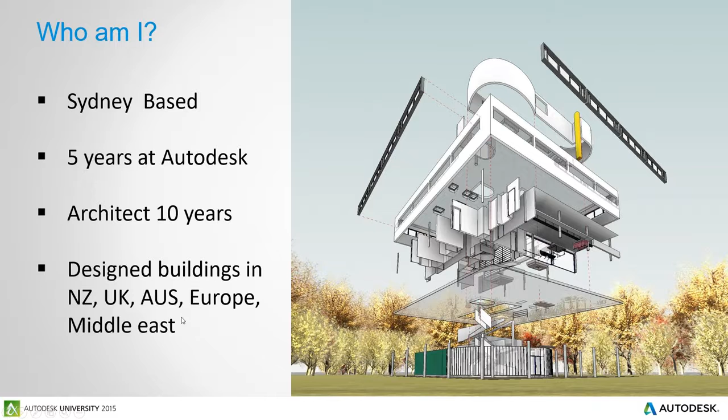So I'm based in Sydney. I've actually been at Autodesk coming up to 5 years. I was a professional architect, mainly in the UK for 10 years, and I've designed buildings in different parts of the world. Some of the firms that I've had experience at was HOK, Building Design Partnership, working in conjunction with construction-led procurement routes, so heavily working with companies like Laing O'Rourke and Balfour Beatty Construction, where it was a design build procurement.

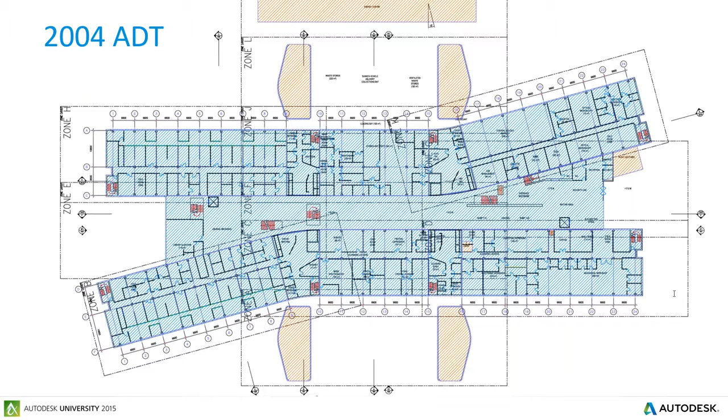The one here on the right, this one was started in AutoCAD Architecture back in the early 2000s. It was a Medical Research Council building for the University of Cambridge in the UK. What happened is when we started it, it was like this. This is ADT back in the olden days, AutoCAD Architectural Desktop, and we were working in zones, working with complex CAD systems to set up different libraries and elements and standards. By the time this project got finished and got built, the contractor ended up redoing it inside of Revit. So here's the project here, rebuilt in Revit, and this is used mainly for facilities.

So you can see here all the laboratory elements have been built into the model. This, of course, can be rendered using the Autodesk Cloud A360 rendering. And with all the details, we can also start to use some of the features in Revit, like exploded assembly drawings. So for something that needs a little more explanation, like a laboratory table, you can grab all these elements and pull them apart from the model and create these assembly visuals to better explain how those parts get assembled together on site.

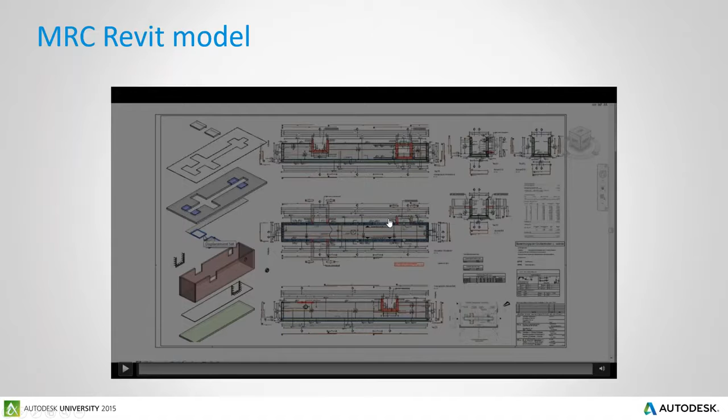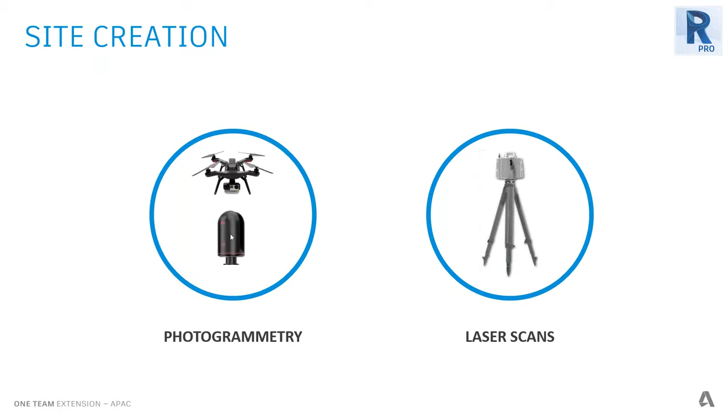On the left here, we have photogrammetry, and this is very popular for large sites where you can fly over them with drones, and you can take the photographs that you capture with the drones and stitch them into 3D models. There's also the Leica scanner here as well, which is a very simple and easy portable scanner to use, and that can also capture site information. So there's 2 ways that you can capture the information and then use it within the Recap 360 Pro application.

So as mentioned, data capture, this is the laser scans for the sourcing, or it could be photogrammetry data depending on how you capture it. What we do is we take that information and we load it into either Recap natively inside of the desktop product, or we can go to the cloud and take that photographic data and it will stitch it together. The result here is that we can optimize that data. There's also tools to clean it up and then reuse that clean, optimized data inside of your authoring tools like Revit or AutoCAD or Civil 3D.

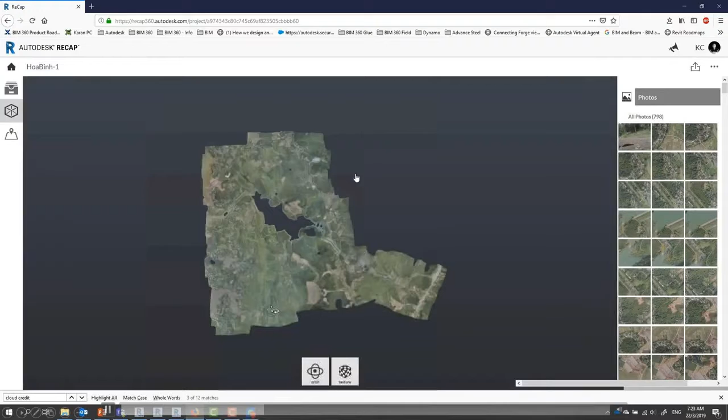So I've got a quick example of a drone photogrammetry scan of a large site that one of my colleagues did in Singapore. And this is the video. So hopefully there's not too much lag. What we do have here is the Recap 360 interface, and they've gone and captured all these photographs and they've loaded them into the file. Recap knows how to stitch the information together.

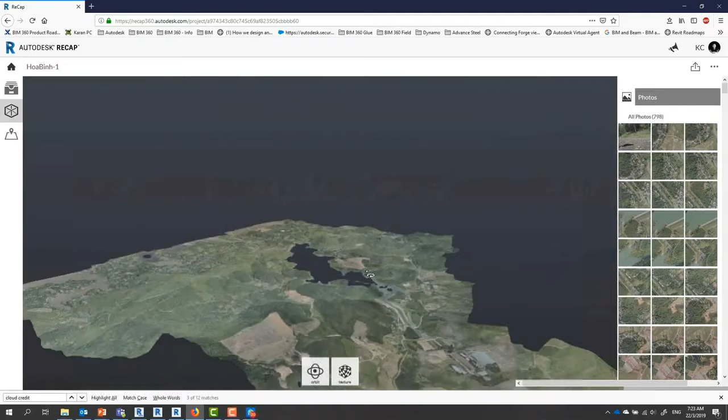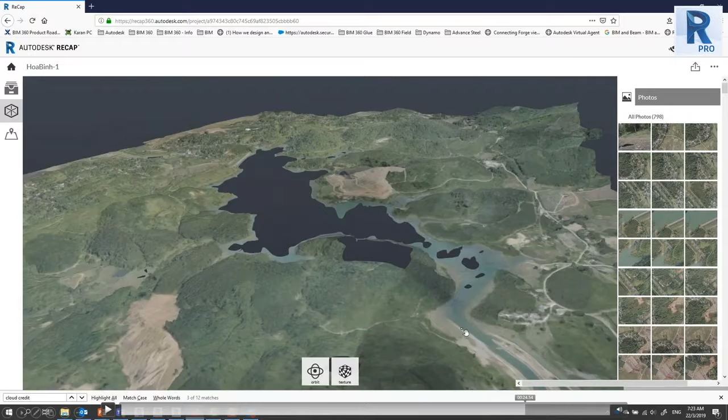Now, in certain sections, if you haven't flown over them or there's a lot of reflections, it may show certain holes. But usually if it's an overcast day and there's not too much contrast, you can get some really good topography information just by using a basic drone. So that's what it looks like inside the application. I'll just go back to the beginning here. It's just photographs. You load them into Recap 360. It stitches them together, and then you have a 3D site for you to work with. So that's more of the macro scale.

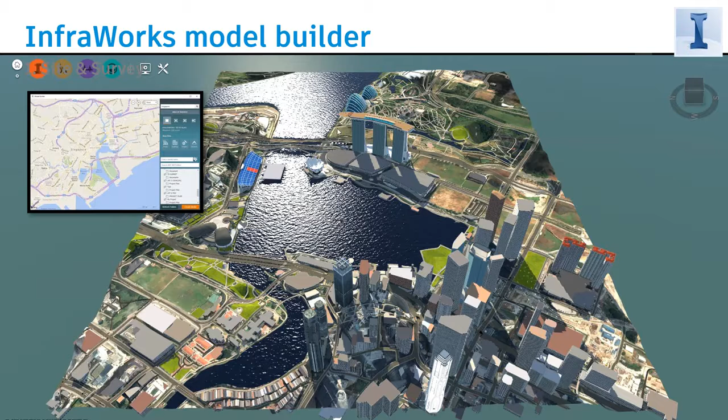So the site I have here on the screen is Singapore, and some of these buildings have been captured from the model builder. Others I just got from the SketchUp warehouse. I brought them in and positioned them on site to give us a quick fly around of what the Singaporean harbour is like here. So the video I have here is how you go and use your model builder to capture the site. So all you've got to do is choose your location in the world, and you can put in your exact street address that you want.

I'm just going to choose Singapore and navigate into the main bay here, to the main marina. And what I want to do is capture a certain area. Now, you can go right up to 200 square kilometers should you want. So you can pull down some pretty large site data here. This one I'm going to keep under a square kilometer.

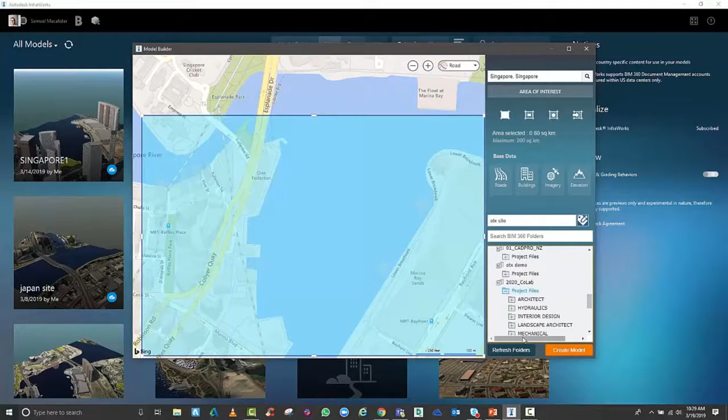What it's got here is basic topography information, and that's based on DEM data. So it's going to be within meter accuracy. You're not going to get millimeter accuracy with this. We've got the imagery coming from Bing Maps. We've got buildings that are available, and these are basic buildings, roads, and in some cases there are underground services available as well, so underground train lines.

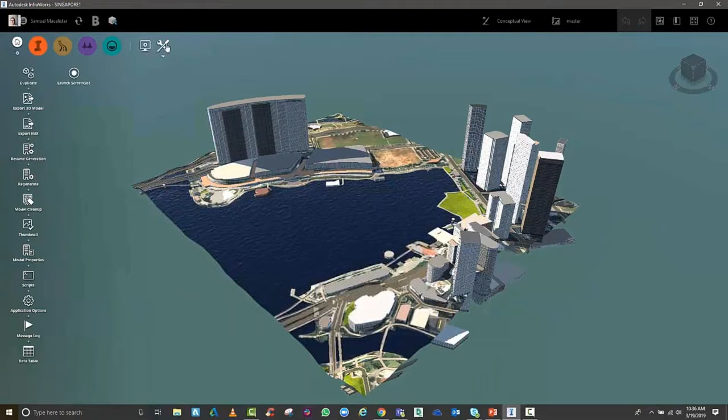So that's gone to the cloud and it's pulled down this model for us. So this is what you're going to get for free out of InfraWorks 360 if you need a site to begin with. And again, this could be for a feasibility study, just for conceptual design, you just want a basic idea. Now, let's say we want to go a little bit further with this.

Do excuse me, my fan is running a little bit hot on my computer. Hopefully that's not interfering with the audio too much.

What we can do here is we can export it out from InfraWorks as an IMX file format. Now you can do it as FBX or convert to other file formats as needed. Basically what this is going to do is allow you to bring it into our Civil 3D application for deeper development.

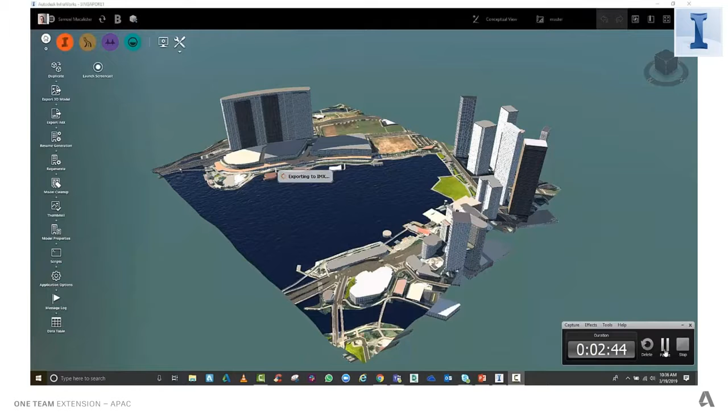So just bear with me, I'm just going to sort out my fan. I'm getting pretty close to renewing my computer. It's a special computer which can be overclocked, and sometimes when you have it turned up on turbo, it can fire up the fan when it gets a bit hot. Okay, so I apologize about any audio issues here.

So what I just did before was I pulled down that data from InfraWorks 360, great application you get in the AEC Collection. You pull the data down from the cloud, you've got a free site model. But let's say you want to take it into a vector-based application. You can bring this into Civil 3D. So what I did was I exported out from InfraWorks an IMX file, and now I've imported to Civil 3D.

And now we're starting to see something a bit more familiar in terms of some basic topographical information, some contours here. We've got the layouts of the roads, and in certain points there is some underground information here as well. So again, it's a great quick way to get some basic information to start your site master planning or urban designing, just site context for your buildings.

Now, I'm bringing this in. I'm just going to use some default coordinate systems. If you're familiar with world coordinate systems, then you can set this all up. In Australia, we use the map grid of Australia. And again, this is always changing. I do believe the one in Perth has changed just recently. So it's always good to work with a surveyor to make sure you're using the right map grid system.

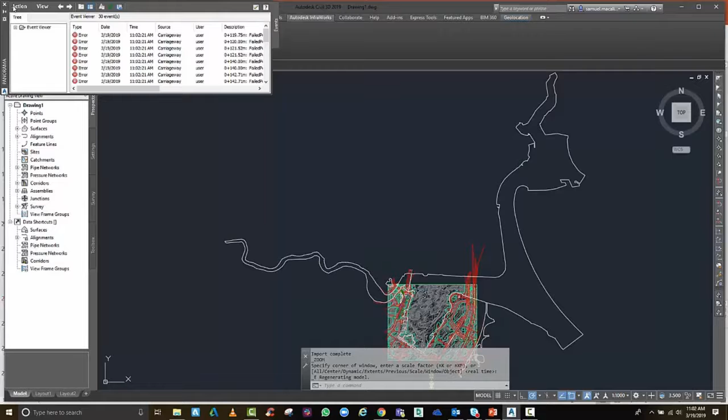But here we have our IMX file that's been exported out of that free InfraWorks 360 file. And here's what we're getting. So we're starting to get some information about the grading. We've got the topography information. It's all being put onto layers for us. We can select on that information and we can start to look at what the data is.

Over here on the right is some of the information about the underground train line services. All the roads are there. But it's a great starting point for conceptual design. Now, let's say you're not an AutoCAD person or a Civil 3D or InfraWorks person. You just want to work on this in Revit. What we can do now with BIM 360 is we can link that Civil 3D file into Revit and use it as a topography file.

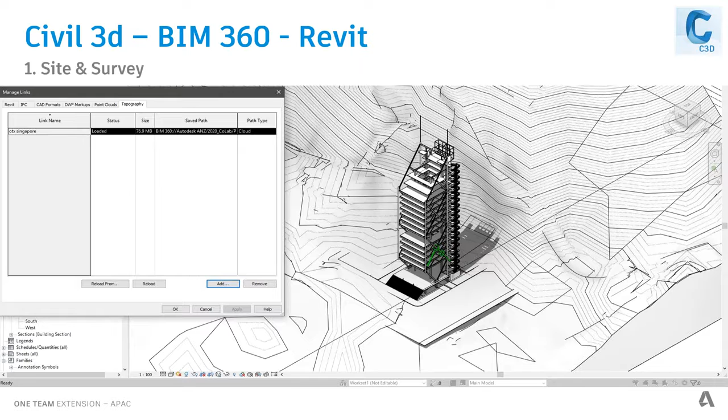Now, again, it is conceptual modeling. It's not perfect surveying. So if you're doing this for a large site, it will work really well. Just wanted to show what this looks like when you use it inside of Revit. You want to connect that Civil 3D file and collaborate into the Revit environment. So here we want to publish the surfaces.

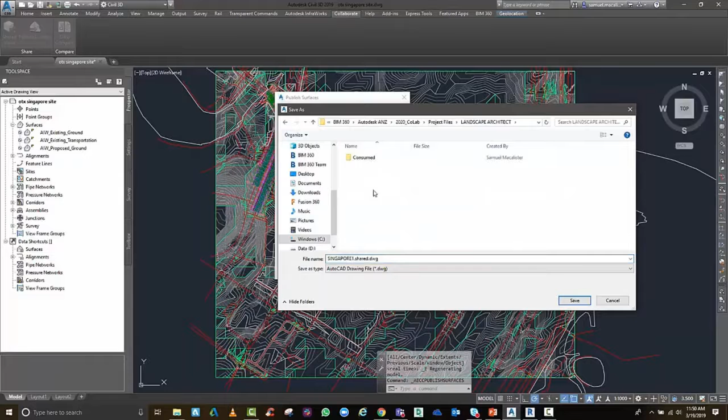So you can see there's some information here on the transportation, proposed ground, existing ground. It says AW, Autodesk InfraWorks. That's where we captured those sources from, and it's converted into surfaces. All I'm doing here is I want to save this information out. Now, this one I'm just going to save as my DWG. And what I want to do is maybe even filter through some of the information, depending on what I'm wanting to save out. I'm just going to go with the defaults here.

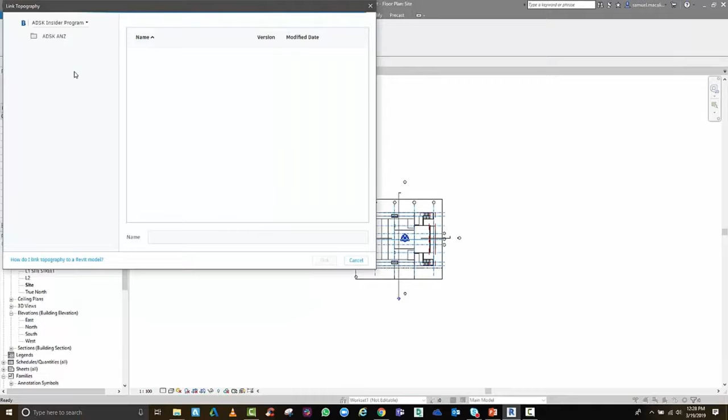Again, it's talking about inaccurate results. We do know that this is a conceptual model that we pulled down for free. As mentioned, check out Nearmap or Esri if you want more detailed data. What we've got here is we've got that file saved out, and we want to bring it into Revit. So here we can link the topography that we've saved from Civil 3D into Revit.

So here we have the OTX Singapore file, and I haven't bothered with shared coordinates. This is the file that I've linked in, and I'm just going to ignore those pop-ups. It's just stuff to do with proposed ground. But you can see here, I've got that topography information that I pulled down from InfraWorks 360 and configured with Civil 3D loaded into Revit.

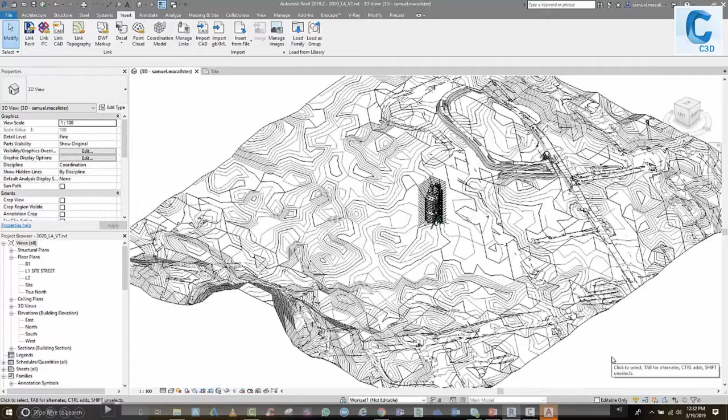So that's the basic 101 out-of-the-box demo. Of course, if you spend more time configuring it and sorting it out and cleaning it up, you can get some great results. I would use this for the large-scale master planning. I think anything more detailed, you want to look at a paid service for capturing the data. But this could still be a great one to use if you're doing very quick conceptual workflows without having to create all this information yourself in a very short amount of time.

Okay, so moving into the conceptual design space, we've got a few tools here that can help get you up and running. The ones I want to recommend are 3ds Max, Dynamo, and Insight 360 for doing analysis on how that building might perform, whether it be energy use index or solar or daylighting analysis. And one that's outside of the AEC collections is CFD, and this could be doing the wind wake analysis of how wind loads may affect the building on the facade or going around the building and speeding up and affecting the immediate environment.

We're looking at Dynamo for Revit, and we'll have a video showing you how you can use it to optimize your design or facade options.

3ds Max is a great rendering tool used in movies and gaming, but it's also a very powerful modeling engine for quick conceptual designs. We also have the energy use index and daylighting tools inside Insight 360 for analysis, and CFD for wind wake analysis.

3ds Max is across all of our collections. It's in the AEC collection, and has been there for a long time. It has a great tool to link your Revit files into 3ds Max if you want to do high-end renders.

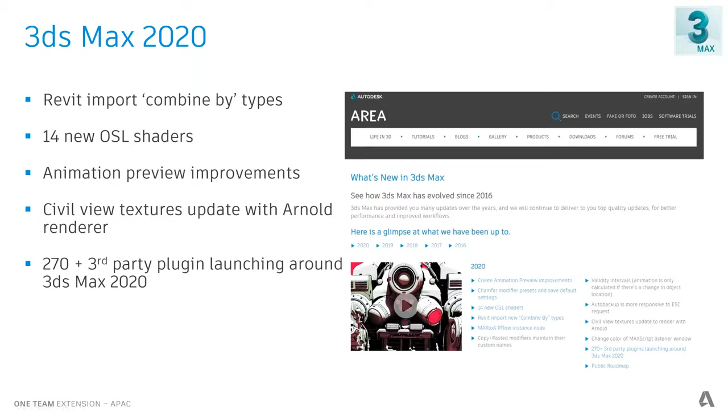There are other things, like if you want special types of cartoon renders, you can use OSL shaders, which is kind of cool. We've also got the Arnold rendering engine inside 3ds Max now, which is free, replacing our Mental Ray rendering engine.

Probably a lot of people don't know, but 3ds Max actually has a number of AEC design tools. Here we've got stair tools, bifold door tools, steel profiles. All of this can be very quickly used to mass up and design a building without having to go to visual scripting or make it manually and group it and muck around. It's got these powerful tools built in.

So you don't need to know all of 3ds Max. If you just knew 5% of it, it's a really handy tool. And then to render it, there are so many powerful rendering engines available.

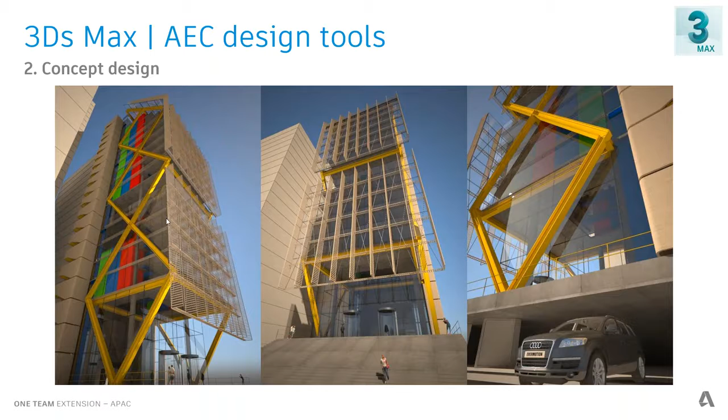One of my personal favorites is V-Ray, one of our partners. You can get renderings out like this in minutes with these types of rendering engines. Again, it's conceptual design—you just build it all in 3ds Max and render it in 3ds Max. It's lightweight, and you can get great results.

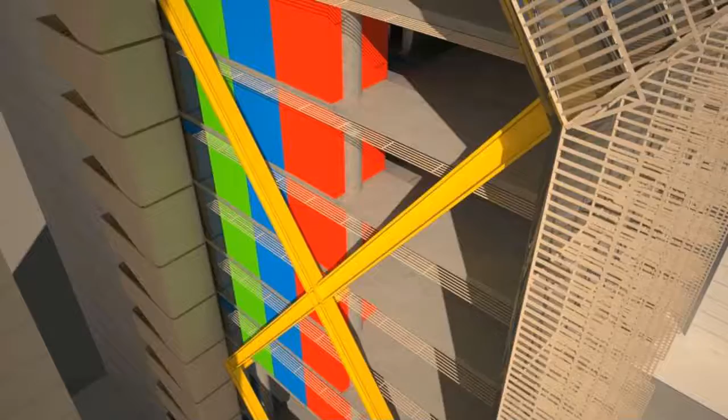Another thing V-Ray has done is create a cloud rendering engine for animations. So what I can do here is render out this large building of 900 frames within 40 minutes on the V-Ray cloud, then load it back into the 3ds Max environment and create a movie. This is a pretty detailed data set.

You can see there's a lot of fins, curved objects, trees, people, and all the plant equipment. This took 41 minutes to render this 900 frame animation on the cloud. Just rendering one frame can sometimes take 40 minutes, so doing 900 frames in 40 minutes is pretty powerful. I didn't hold back on adding a couple of trees and detailed people in here. It's a great conceptual design, modeling, and rendering tool for your workflows in the AEC collections.

Dynamo is growing really fast. You don't necessarily have to be a Dynamo expert to learn scripts, but it does help to know one or two, or to have someone in your practice who knows how to use it.

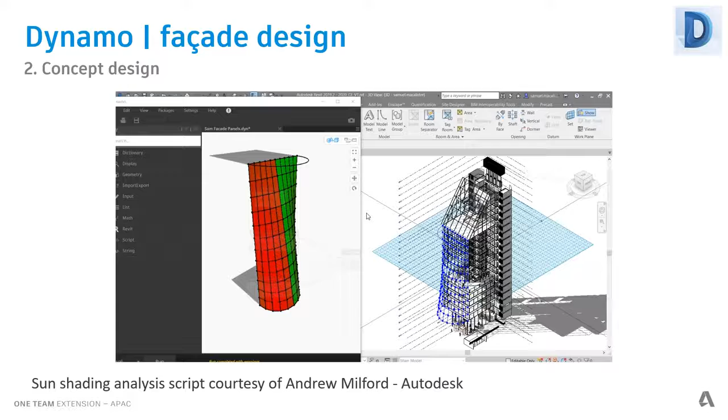This particular script was used for the facade design of the building, and I got some help from one of our specialists, Andrew Milford, in consulting. He helped me put together a script which looks at sun path analysis on the facade of this building.

So inside Revit, I'm firing up the Dynamo visual programming studio editor and loading up this script that Andrew shared with me. This can be used again and again on all projects—it's just what's called a DYN file. You can see there's a whole lot of nodes and wires looping all this information together.

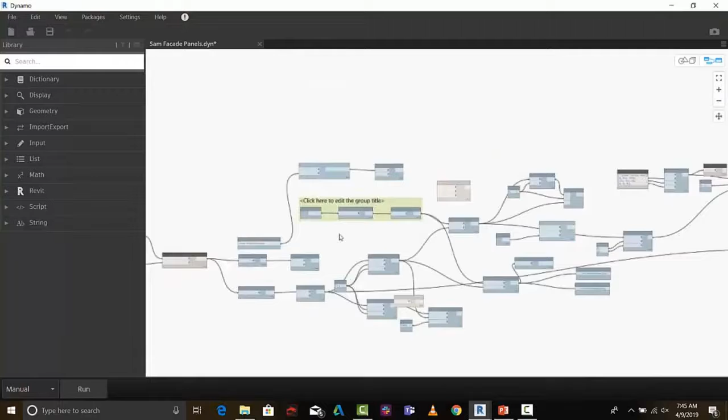There's a little pseudo color range for an overlay on the facade. I don't need to know how to use all of that—all I need to know is how to connect it to my Revit model.

All I'm doing here is selecting the top floor level where my facade is going to finish, then selecting the bottom floor level where the facade is going to start. That's now connected to the Revit model, and I'll hit run, and that will create the facade design. Now, this is a curved facade.

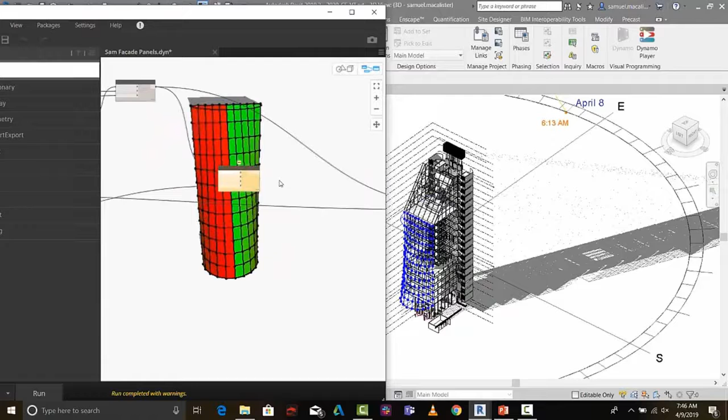We were just playing around with some ideas of what this could be. If I want to flex it, within the nodes there are sliders that allow me to flex how many curtain panels we want to have. So again, it's just basic sliders—10 floors, 12 panels.

We can either increase it or drop it down. I'm going to reduce it to say 6 by 6 and then run it. This will go from being 10 by 12 to 6 by 6, and that will adjust automatically.

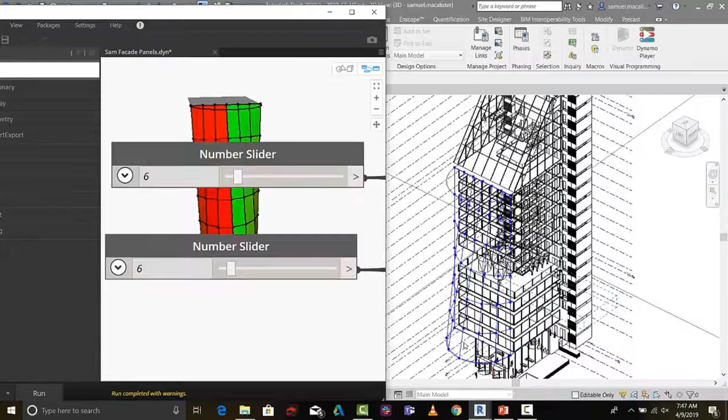The great thing about this tool is once you've got it set up and you want to drive different options, you can do it with the Dynamo tool. It's design automation using visual programming to run those tasks for you. That's a handy way to use Dynamo in the conceptual space to test design options.

If you want to know more about these tools or that particular workflow, we have some really powerful users out there. If you search for Dynamo, Autodesk Dynamo workflows on YouTube, you'll find thousands of videos.

This one's pretty cool, similar to what I just showed. It's by a user called Jeremy Roh, and he does some really advanced curtain walling panels with the sun, the azimuth and the altitude, with the sun going around the building, and how those building panels will adapt with shading devices to best shade that type of curved facade. If you want to know more, check out power users like Jeremy Roh.

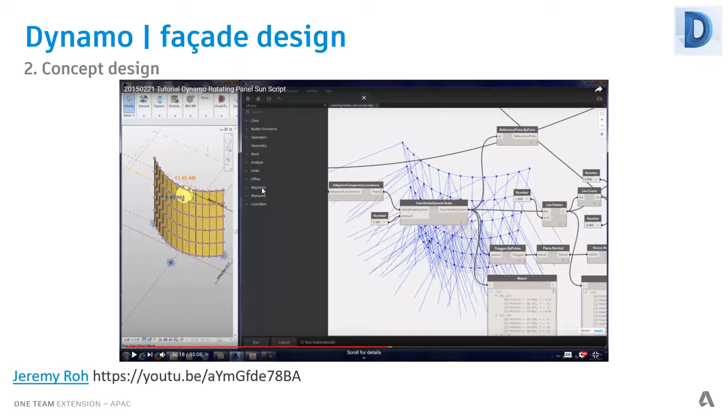We've got Insight 360 for our conceptual energy analysis, and I have to stress that it's conceptual. It's not going to be Section J approved. It's going to be guidance to help drive design options inside your workflows, as opposed to meeting local codes within the part of the country you're in, or working with local national codes.

So what this is going to do is allow you to start looking at solar analysis, daylighting analysis, and energy use index, how things are going to cost when you add double glazing as opposed to single glazing, or if you want to make changes to how the buildings run.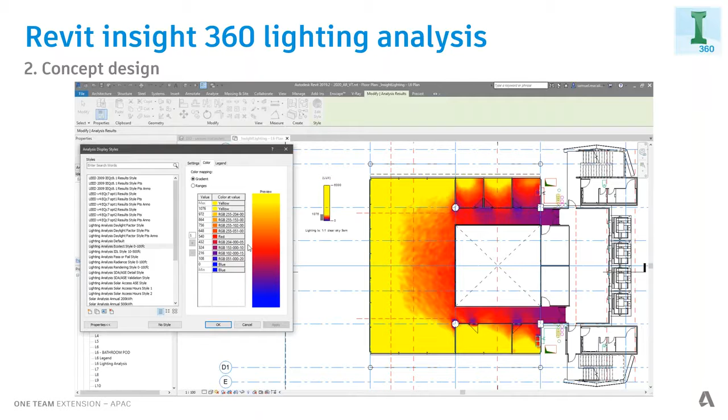When you set this up, you can do it with your Revit model. You can even do it with conceptual design in our Formit application, but that's very basic. I'd recommend using Revit here.

Now what you're seeing here is our artificial lighting with these tubular lights, and our daylighting giving off illumination at certain times of the day. So we can see our direct lighting, we can see our artificial lighting, and again, it's not as bright as daylight. It's going to be a little lower, I think 3,200 is the correct illumination level for that.

So you can see that's why it's showing red, and then of course our darker points are showing blue down here.

To get this running, in your Revit environment you can send it to the cloud and run it from sunrise to sunset. Just before I run this video, this one's been set up with a camera inside a Revit model, and we have the date. So in April, we want to start at 8:52 and go to sunset, going into winter.

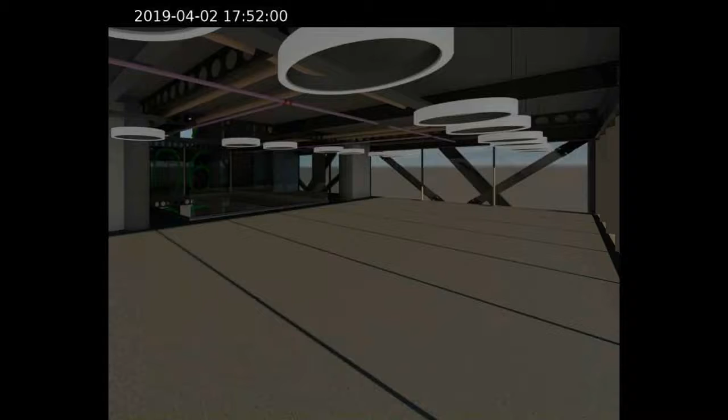When I hit play here, you'll start to see the sun at 10:52, 11:52. We're starting to get a bit of light coming in. Then later in the day, we're getting that low winter sun penetrating the floor slab. So maybe on one side of the building, we might want to consider some sort of shading devices, whether external or internal, maybe automatic or mechanical.

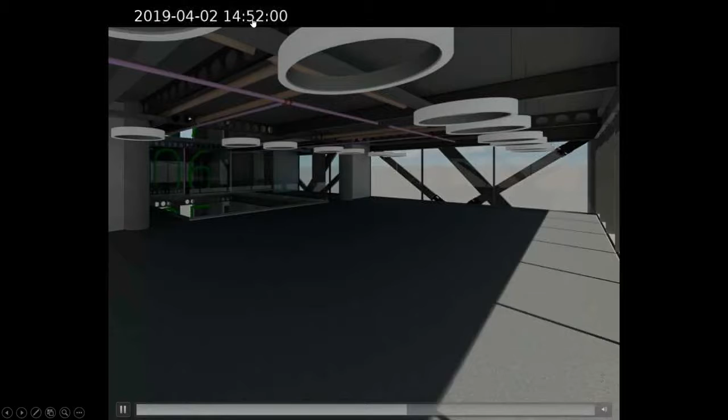But with this basic tool, we can just run it on the cloud. It doesn't have to run on your computer, and we can instantly see how much sun is entering the space during different times of day of that April sun path.

We can do this both for winter and summer. So on the left, we're looking at winter. The exposure has been adjusted a bit more here to make it brighter, but this is where we're not getting as much sun penetration. And you'll see on the right, this is our summer sun penetration.

It's going a little slow here, so this is playing. You'll see that because it's summertime, the sun is a lot higher, so it's not going to have that low winter sun penetrating the building as much. We'll see it come in a little bit, but it shouldn't run as deep. Whereas the one on the left, you can see it's running a lot deeper - that's more your winter sun here. So some really handy tools to give you an idea of how it's going to work with your sun path analysis.

Moving into conceptual CFD, computational fluid dynamics.

This is when we can start to position our building in the city and understand how wind wake might affect it. We've had customers in New Zealand and Wellington who are starting to use this because they've got a very windy harbour, and every time they design a building, they need to assess whether the wind is going to build up around the building and then go onto the streets and knock pedestrians off their feet. That's how bad the winds are there.

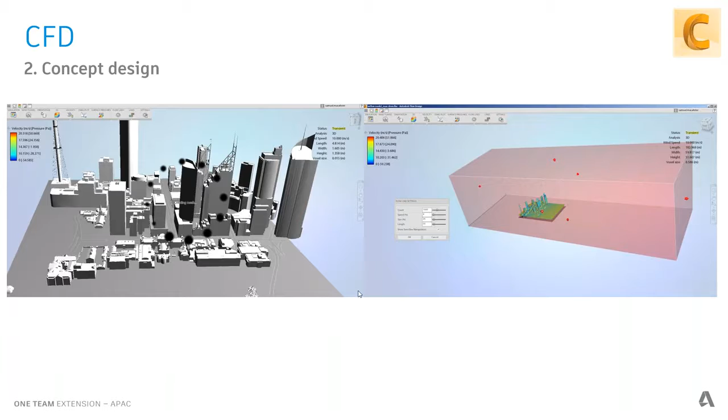So what this does is you can load in your models, whether it be from Revit, from FormIt, SketchUp or Rhino, or whatever conceptual package you're going to use. You can load into the CFD package as an FBX, and you can start to set up the wind velocity. This demo has the wind speed running at 10 meters per second. I've created an artificial wind tunnel here, and we can basically set it up to run and move around the buildings. The longer you leave it, the more it's going to refine, and you'll be able to instantly see where the pinch points are for the wind going around the building.

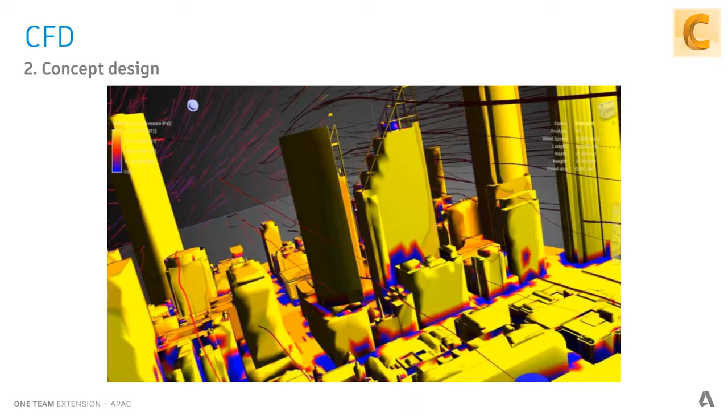This is what it looks like in the package, so how you set it up. Again, you can start to examine that wind flow in several different ways. This is done for interiors as well, if you want to use it with artificial air handling units. If you want to set up the wind flow from a diffuser, from a mechanical supply air diffuser, you can set that up and look at thermal comfort of users inside a space.

Here we're looking at wind flow going around this building and when it's starting to get high. You can sort of see here on the left hand side, the velocity is speeding up. These red points are dangerous points if you're walking around that cylindrical building and the winds are blowing - you could get blown off your feet. Little mini wind tunnels right there.

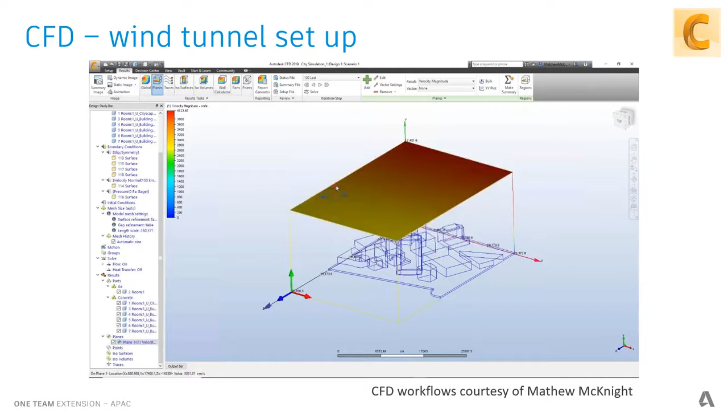Basically, you can work with really simple models. You don't have to be an expert in terms of making the models, and then you can configure how you want to refine it. We've got some basic workflow videos of how we're doing this. So we're setting up some planes to cut the building. Now, it could just be a wind tunnel, or you may just want to work with a plane here. We can do this vertically or horizontally.

As we drag that plane up and down the building, you can start to see maybe higher up the wind speed is a lot quicker in terms of velocity, and as we get a little bit lower, it's slowing down a little bit. We can also display it with vector arrows as well. There's also another one for doing ISO surfaces for the interiors, and we can change the appearance and so on.

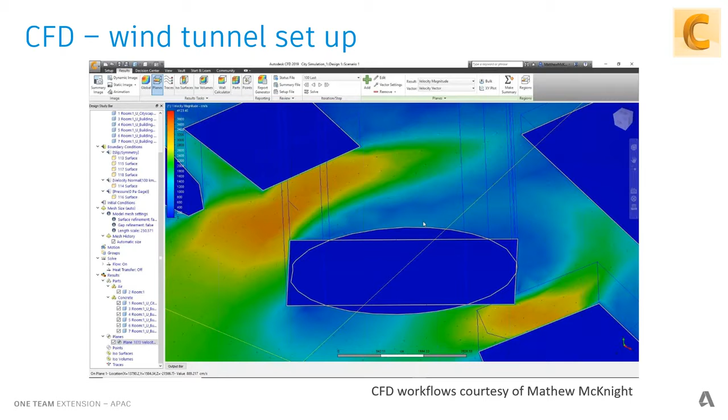So this is a really handy tool should you want to go beyond your AEC collections - this is CFD for analyzing your buildings. And then finally, just a quick video showing the wind going over here. Again, they use this for wind tunnel tests for cars and airplanes.

Okay, so moving into developed design, and we're going to be getting into a lot of our core products here. So Revit, of course, is going to be our main detailed and developed design application. There are other tools like Dynamo to help you with your documentation automation. You may need to be using tools like 3ds Max to do photorealistic renders to communicate what your detailed design is going to look like.

And then we've got other tools outside of the AEC collections like BIM 360 Design for design collaboration, BIM 360 Docs for document management, sharing all your documents as an online file, and BIM 360 Glue, which is used for model coordination.

So what we've been doing, just to kick off on Revit, just so you can understand where Revit's going, we're trying to improve how we connect teams integrating with the products, and that's where we have Revit working with Revit Cloud Work Sharing on BIM 360. We're also trying to improve how we create and author information or automate it. With the Dynamo Player, we've got a new tool called Project Refinery as well, and even a headless version of Revit called Revit.io, if you're wanting to get into that side of the engine on our Forge engine.

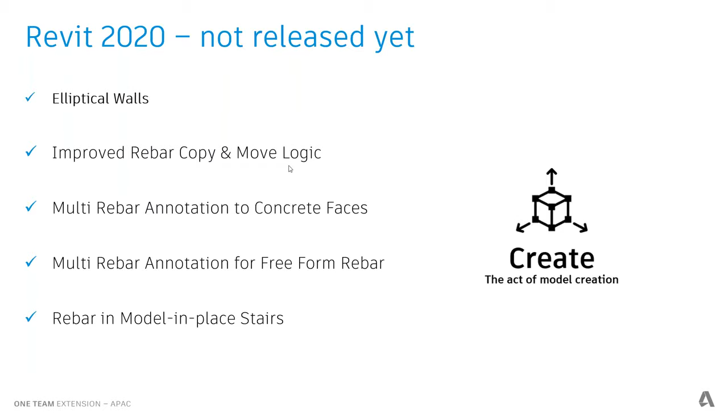For path of travel, this was a new one released this year where you can start to work out your escape path. So you can draw a line from your core to your exit doors, or from your furthest part of the building to the core, and it will know where the doors are, and it will start to work out the best path of travel. We have improved OR and view filters if you need to do that for your filtering.

And we've got a better material user interface, image and PDF improvements, better tools for tag, schedule, and view filters for elevations, and track and edit scope box parameters in the view list. So just little things that we've been adding to the application.

So to see a couple of these, so if I just play here, PDF into Revit, just a handy little tool. You can now insert a PDF in Revit. The PDF will be placed as a 2D object in the current view only, similar to previous image functionality. You can modify your PDF like any other image and manage the PDF in the Manage Images dialog. This resizable dialog newly supports adding or reloading a PDF.

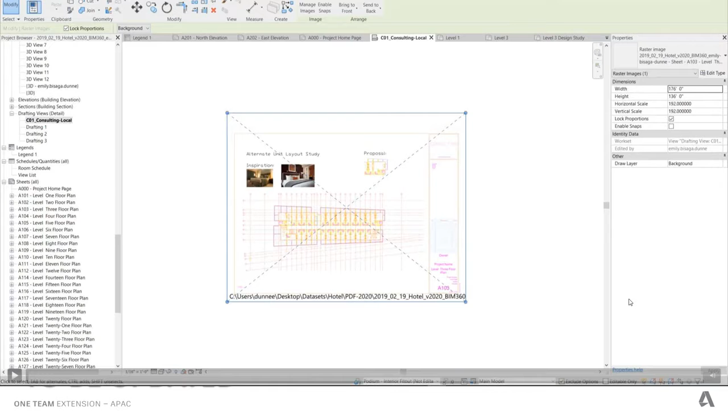With the PDF button in the Insert tab, there's an option for large or small thumbnails. If there are multiple pages, you can select the page with the thumbnail or by number. The page number and the page size of PDF are reported in the type properties. The resolution of the PDF can be adjusted. So pretty simple stuff here, but powerful for your workflows.

What I will just note here is if you want to see all these videos, we do have the Autodesk Building Solutions website, and the presenter there, Emily from the technical marketing team, has actually put together a few videos here to actually take you through those workflows. So if you need to watch these again, they're all here on the Autodesk Building Solutions website. And this has stuff on Revit, stuff on other applications, stuff on what users are doing, all available to keep you updated on new features as they get released inside of products or collections.

So I'll just go forward just a little bit. This one is just the splash screen for Revit from 2019.2.

You now have a splash screen here where you can actually see your BIM 360 environment, and for increased workflow efficiency, you can publish it directly from the splash screen. In the past, you used to have to go and do a pop-up for anybody who's using BIM 360, and you had to wait for that.

Now you don't even need to fire up the project. It will just tell you there's an update available from Revit Cloud Work Sharing, and then you can publish it, and that published model is going to be available for you to view inside of the BIM 360 Cloud.

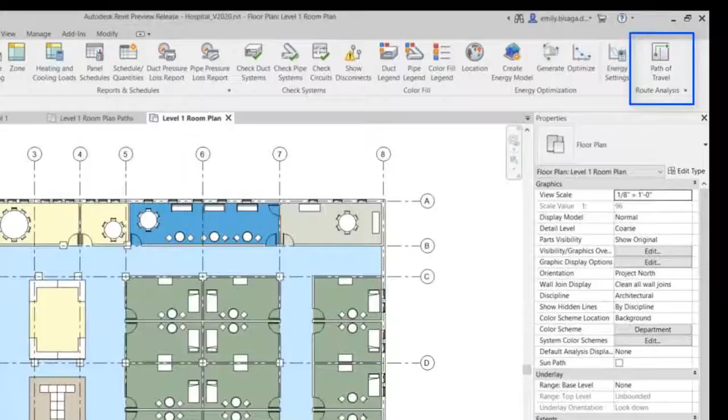Path of travel. Path of travel is looking at the distance to get from point A to point B. The one we have on the screen here is maybe from a nurse's station to a patient's room, or it could be from the furthest corner of the building to the escape core. All we need to do is basically draw a direct line from point A to point B, and it will find that path of travel, go to the doors and go through them.

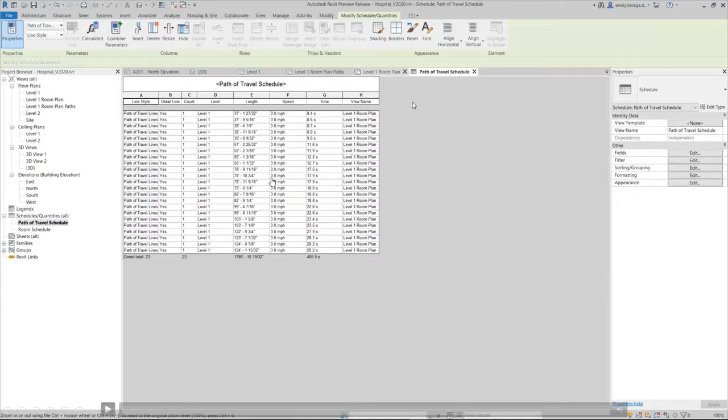It will also allow us to schedule the information. So we can start to look at the speed we're going to be going at, what level it's on, maybe the distance if we want to take that out. Sorry, the length here is in imperial, and then the amount of time it takes to get there. These are just some basic, simple tools that can really help you work your designs. There are other tools where you can start to do alternative paths as well, which will be improving. All of these things are available in the newer versions of Revit.

If you do want to get into design automation in Revit as well, we've got some really powerful users out there doing some really cool stuff. This is one user called Paul Wintour from Parametric Monkey. He's got some really good tools to help you with your startups, to automate some of the mundane things you might do when you start a Revit project, things to do with documentation which you might not like, such as renumbering doors and windows. He's got tools for that. He even goes into management tools and analysis tools.

So if you're based in New South Wales and you've got to follow SEPP 65 solar access, he's written a Dynamo script for that as well. I'm just going to show a couple here. This is what it looks like inside the platform. Instead of firing up the nodes and the wires of Dynamo Studio, this is just the Dynamo Player. The Dynamo Player will allow you to play a script without having to open it.

So for some of those startup things you need to do, like create and rename a work set, you can do that. Add elements to work sets, you can do that. This goes through model groups to work sets, isolated work set views. All he's doing is taking this particular drawing and hitting the script, and it's going to do the stuff automatically for him.

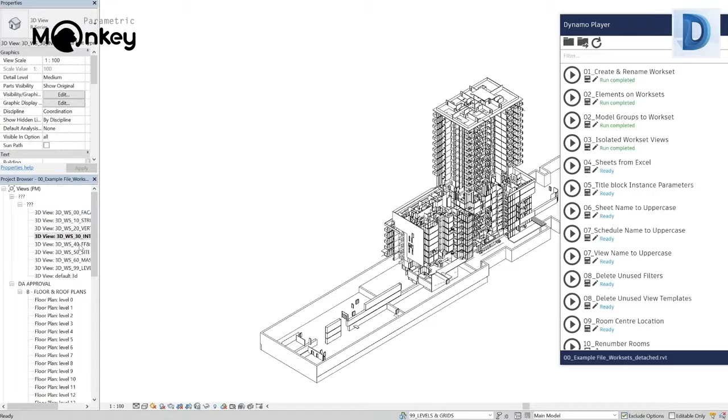You can start to see here a whole lot of names, but he wants to bring in those sheets from Excel. On a big project, there may be someone working out all the sheets that we're going to be delivering for the project. If you want to bring them in, you can actually bring them in from that Excel spreadsheet, and it's going to set them up for you.

Other things we've got here: title block instance parameters, sheet name to uppercase, a simple thing. If everything's lowercase and you want it to be uppercase, you can do that. Let's just see, did that play? Oh, sorry. So that's going to change from lowercase to uppercase inside of the project browser. Then view name to uppercase, you can do all that. And then there are other things like delete unused filters.

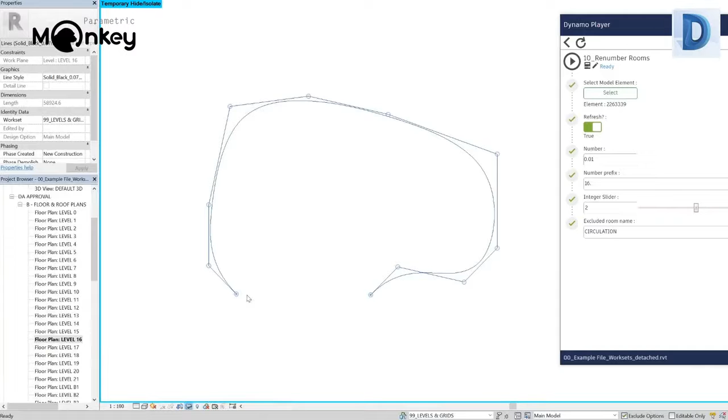This one is renumbering the room numbers. If you've gone and done all the room numbers and you have to go back and renumber them all, especially on a large, boring project, you can use that script. So here he's got his renumber rooms, and you've got a prefix. You can prefix the number, whether it's A or no prefix, numeric, or it could be alphanumeric. Then the actual room number, so .01, all of that can be set up.

He can use that spline to set the direction of the rooms, then run the script, and it is going to renumber the rooms automatically. You can imagine how great this will be on a large healthcare project or a very complex project with a lot of different room numbers. So that's in essence what you can do in your document development using the Dynamo Player to help automate some of those mundane tasks.

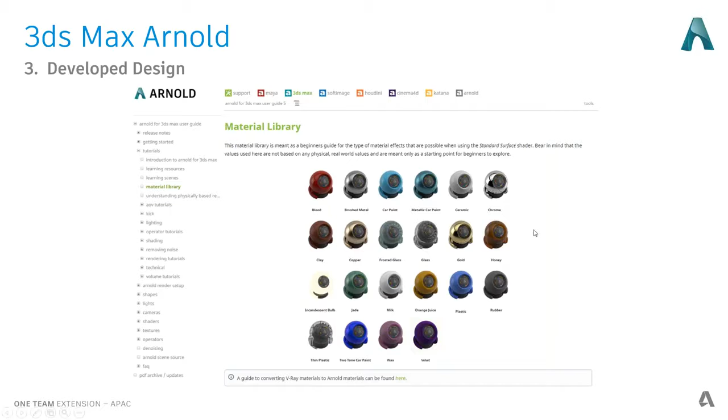So visualization. Now some people do send this out of the house, some people use Enscape, Lumion. We have Arnold, which is inside of the AEC collections now. Arnold, its claim to fame, it was used on the Star Wars movies. It's a powerful rendering engine. It's got some really good physical materials and lighting, so you can get some really good results.

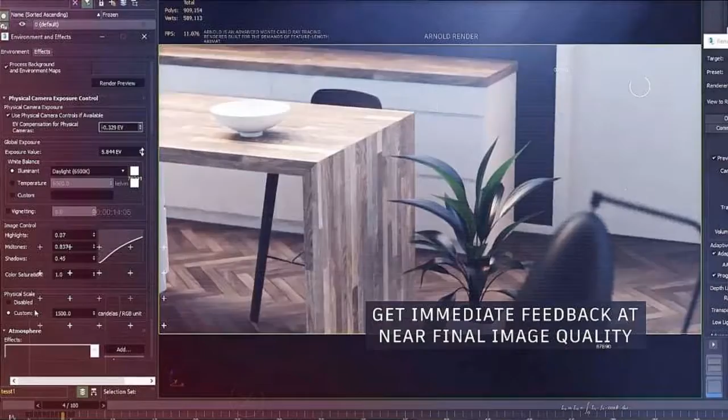It's great for working with maybe some of the newer graphics cards. If you've got like an NVIDIA RTX card, you can start to benefit from GPU rendering. In the past, older devices maybe look at the CPU or only using part of the GPU. This is where you can really start to leverage those expensive graphics cards and use your GPU rendering.

Other things you can do is you can start to look at rendering almost in real time. Because these new cards are so powerful now, you can pretty much fire up a real-time render window, and as you make design changes to your scene, you can see it almost render in real time and see how it's going to produce.

So really powerful new features with this new rendering engine that's part of your AEC collections. It's free, you don't have to pay for it. You've got this new tool which will help leverage your graphics cards to give you photorealistic renderings.

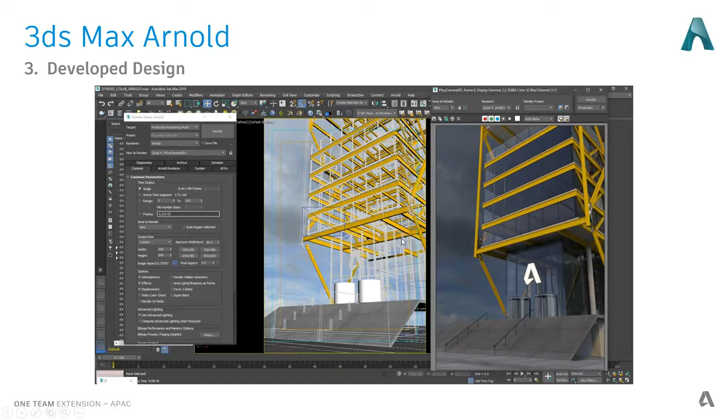Quick example here. Now again, I'm not as good as the guys who do the renderings in Star Wars, but here we have a Revit model linked to 3ds Max using the Arnold rendering engine. So here I have a pretty detailed model. I mean, there's a lot of nuts and bolts in this model with the steel connection details. What I'm doing here is I'm just saving it out as an FBX file.

And then inside of 3ds Max, I'm linking that in. Now you can actually link the Revit files directly, it just comes down to user preference. I'm just doing this as a standalone FBX file. Now for those unfamiliar with FBX, it brings in the textures, the geometry, and some of the lighting environment.

I can combine it via Revit category. And then when this comes in, it's going to come in with information from Revit ready to go. So you can see some of the materials can be ready and reused. It will even start to display things as boxes if it's heavy geometry. All I'm doing here is adding some Arnold lights and some physical cameras.

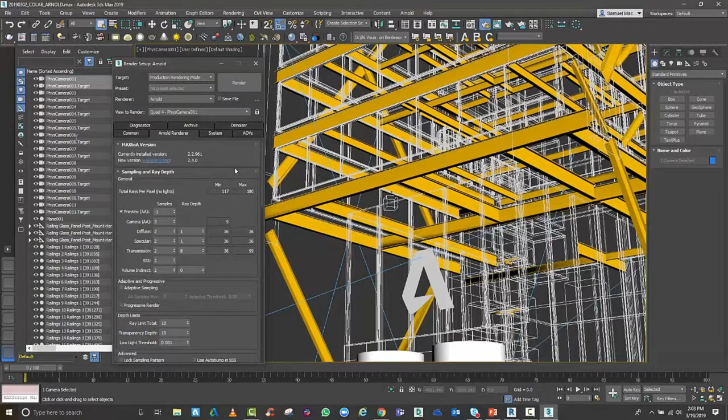And when I go to that camera and want to do a render, I can fire up the rendering engine, which is Arnold. And there's some basic settings here that I can use. The Arnold rendering engine is pretty easy to get familiar with. I'll just leave it on the default settings and hit render.

And this will now go into the calcs, and it will do the initial bucket pass, and then it will start to fine tune it based on the calculations it needs to do for reflections and refractive materials with light passing through them, and the type of skylighting in terms of the HDRI you're going to be using. So this one took a couple minutes, and this is the quality by just doing an out of the box render. So that is your Arnold rendering engine, which is part of 3ds Max included in your AEC collections.

Now, we do have another really powerful application called Navisworks. We've had this for a long time. We are keeping it in the collections, but we're also building on it with our BIM 360 Glue application. Navisworks is really powerful for bringing in numerous file formats. It reads up to 56 different file formats, and it's got clash detection tools, timeliner sequencing tools, quantity takeoff, and even a rendering engine.

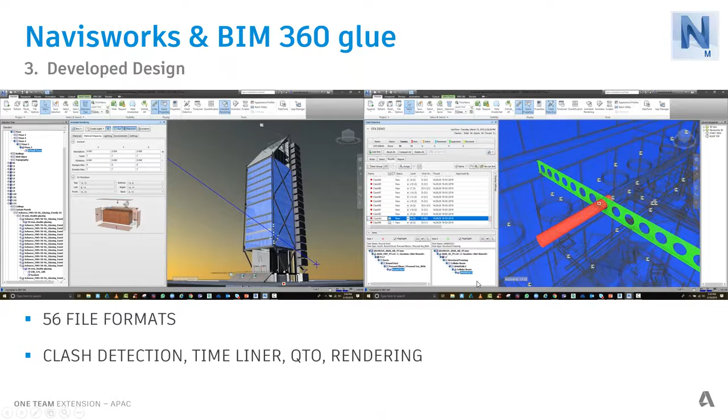So for anybody who's not familiar with Navisworks, doing clash detection is its most popular feature. What we can do here is we can bring in our models. So what we do is we create what's called a federated model. So here we have the mechanical model versus the structural engineering model.

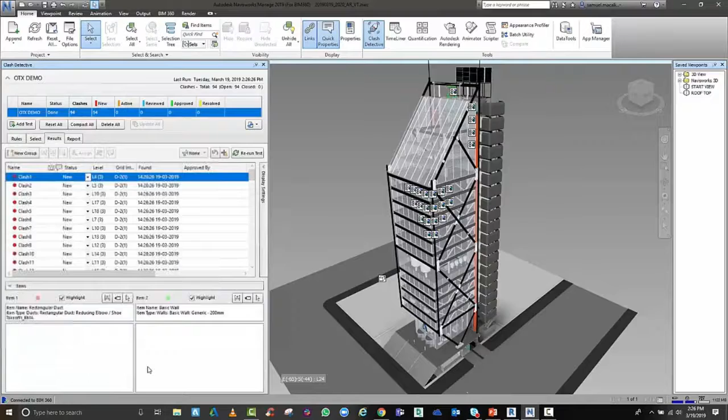And I'm just using the default settings here, tolerance of 0.02 of a meter. And I'm going to run the test. And what it's going to do is it's going to go through the entire model and highlight where there are clashes in my model.

So that bit of ductwork isn't going to fit through that cellular beam. That's going to be a problem if we don't get it ironed out now on site. So we want to make sure that that is highlighted. So what we can do is we can assign that to someone in our team. So I'll assign it to Stefan and say, please make your beams bigger for our duct runs.

And I can then go and export this report out and send it to him, and he'll have all these items assigned to him that he needs to go and work on. There's even tools like Switchback where he can go back into his model and connect to Navisworks. But here's the report. So there's all these items. You'll see they're assigned to certain people. They're either approved or need reviewing. And this is your Navisworks clash avoidance feature.

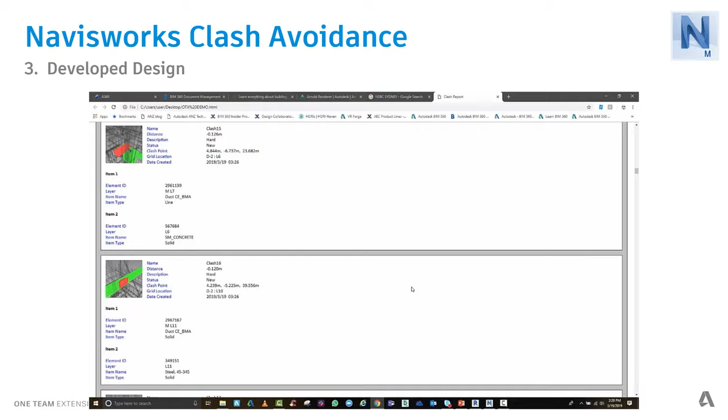Our next generation of this is our BIM 360 model coordination. Now, currently it's called BIM 360 Glue, but we are moving it to being a new name under model coordination, and this is going to be our next generation. It's got what's called an automatic clash detection matrix, and it does things like issue tracking on the cloud. So I'll show you a little video on what that looks like.

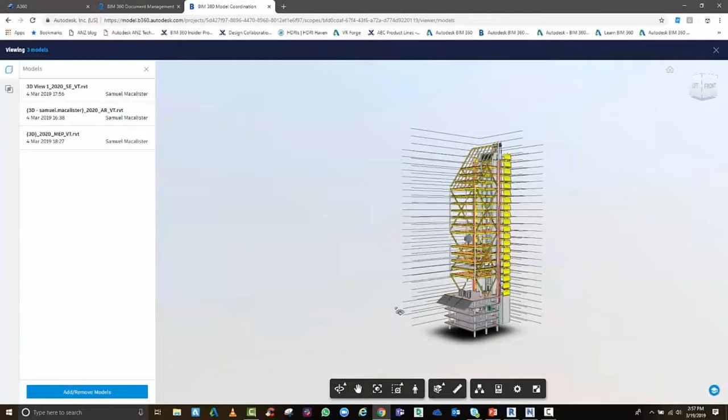So I'm just opening this up from our BIM 360 platform. And I'm opening up the feature. All these models are loaded and they're automatically clashing. So I don't actually have to run a clash detection report. I can see how all the models are clashing together, or I can go and choose the models that I want to run a clash detection on. So here I've chosen 3 models. So over here on the left are my models, and here are all the things that are clashing.

So when I go through each of those 191 clashes, I can visually review them, and I can even break down on the selection tree hierarchy there what's actually clashing. But I can now, instead of running that report like in Navisworks, I can do it directly from the cloud. So I don't need to download a report, send it out to Stephan or Alan or someone on my team. I can assign it to someone directly in my team.

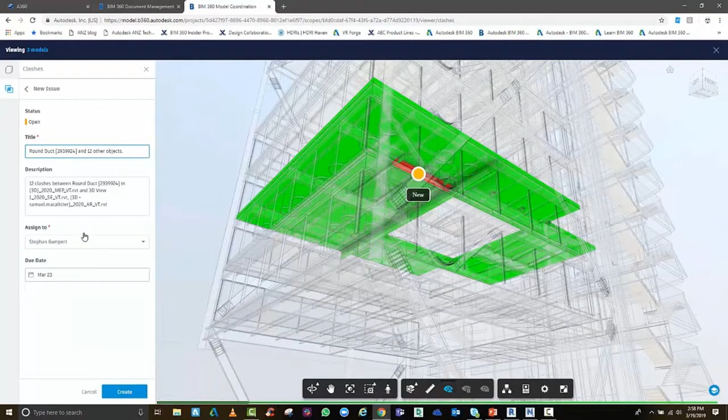So Stephan, again, I want to have him move the beams around to suit my ductwork, and I can create that issue. So he's going to get an email notification and click that link, and it's going to take him straight into the model, and he's going to see what the problems are with the design.

So moving into the final part of the presentation, I know we're getting to the hour, so just looking at the detail you can go to with the AEC collections. Now, if you're not familiar with the level of development within the BIM industry, it goes from 100 to 500. 400 or 350 is getting into fabrication type of detailing. So this is where you're going to be adding all the nuts and the bolts, and the next level is what you could do for facilities management and maintenance.

So with LOD 400, there are some online tools to advise you on what each one means. This one's from NatSpec, the Australian authority for helping us with our specifications, and they also have a Keynote system as well, which you can load into Revit. So we're looking at LOD 400, and this is where we're getting to detailing, fabrication, assembly, installation, and other information.

Then the other one is sort of getting into the verified information. Again, it could be non-graphical. This is where you might have your verified information for as-built for facility management and maintenance. So why do LOD 400? Well, a lot of industries are moving into it.

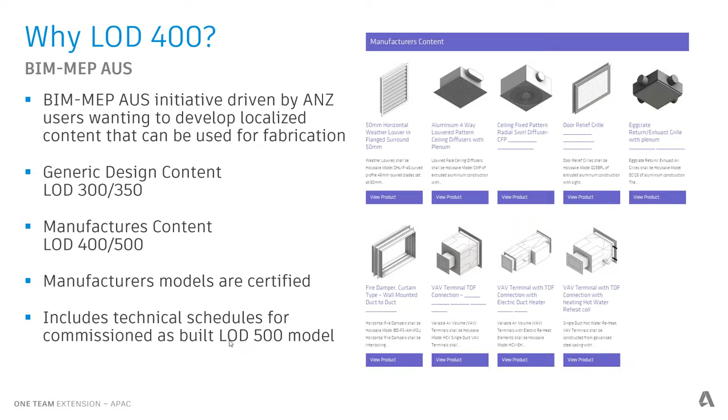So we have the BIM-MEP AUS now starting to develop generic design content and manufacturer's content to LOD 300, 350 and LOD 400, 500. This just means that you can use proper real-world equipment loaded to the space for some of this equipment. Also have clearance zones as well for maintenance. It's all certified, and it just helps ensure that what you're designing and building is correct, and then it can be used for workflows when the building's commissioned, as part of that as-built LOD 500 model.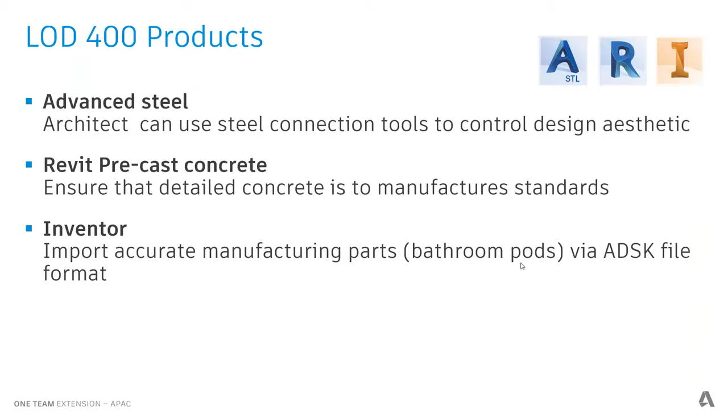So we're moving into Revit, tools like Advanced Steel, and even Inventor for these type of workflows. So I'm just going to touch on these three. We have Advanced Steel, and Advanced Steel is really cool for doing things like connection details as well. This is Richard Rogers' building in Sydney in Australia, and you can see they've got some pretty beautifully detailed connections for the cross bracing of this building.

How can we try and do these inside of Revit without having to be a specialist? We can do this with the Advanced Steel automated steel connection tools. So what I've got here is a couple of connections that I was just learning. Again, I'm not an expert. I would go to someone who's a steel detailer and ask for the final advice, or they could open up my model and add these details.

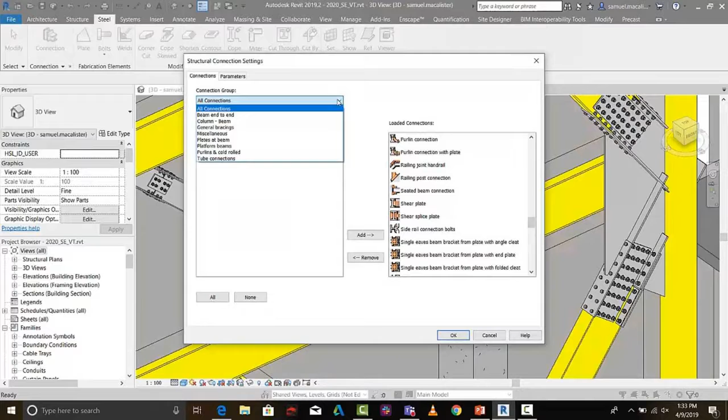So this is the basic workflow. I've got my beams in place, and I want to start to use some of the tools to connect it. So here we have available connections that we can load into our database. So I can either do all connections or filter through the ones I want. I can then go and grab the 3 elements that I want to connect.

So my main beam here and the 2 braces, and I can choose the type of connection that would best work with that space. So the one that I want to look at today is an I bracing splice. So this will basically load into my project and connect them up.

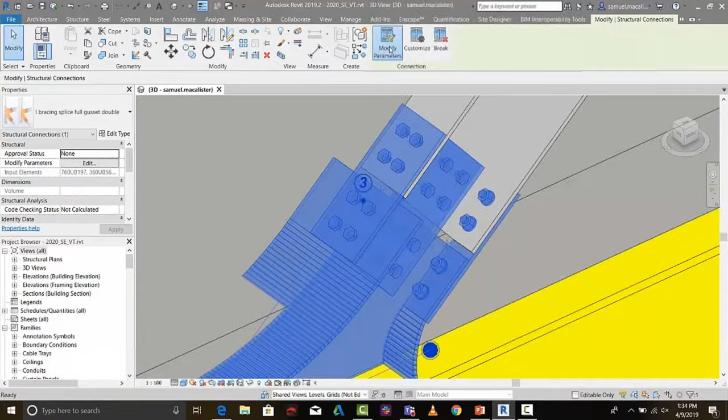Now again, it's not a perfect connection, but I can still go on and add or configure this as needed, but it's a great way to add all the plates and the bolts and the welds that might be needed for that type of configuration. I can then go and open up the properties of that and then start to fine tune it, or have an Advanced Steel expert or a fabricator come in and start to adjust it.

So it's a really powerful tool, and you can see, all the bolts and the washers all added. And if you're wanting to work to LOD 400, this is a great automation tool to help with it.

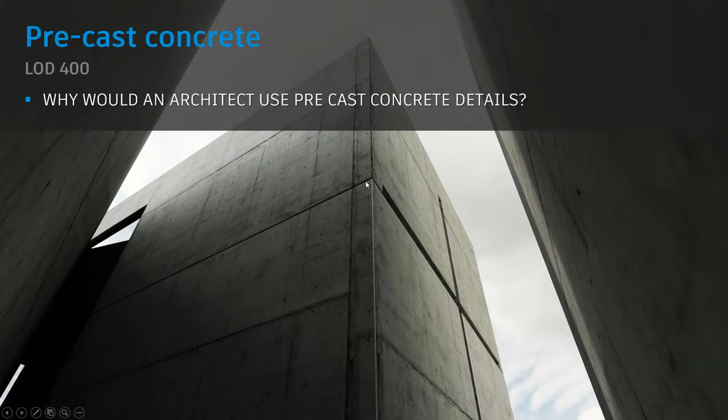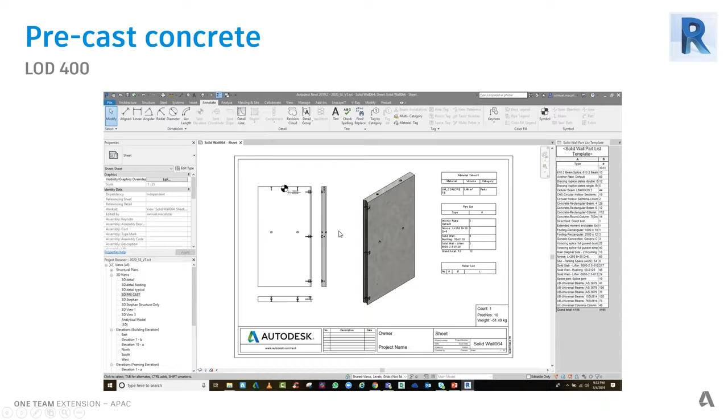Another one we have here is concrete. We've got advanced concrete now coming into Revit, precast concrete, and this allows you to take a standard wall and then break it up into the precast concrete dimensions with all the details you need for the hangers and other little bits and pieces for a typical precast concrete assembly.

So the workflow we have here is you've got to install the precast concrete tab. I've just got a basic wall here, haven't done anything with it. It's a basic 200 mm wide wall. And what I want to do is go to my precast concrete configuration. Now again, you'd be wanting to work with the fabricator on this. So go to the fabricator and ask them, what size can you work to? How do we set this up?

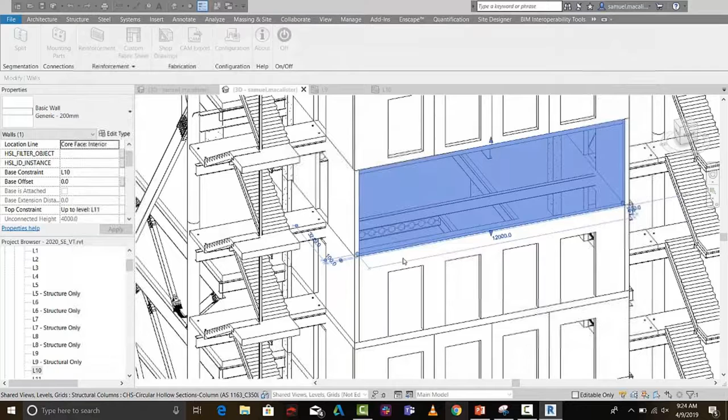What you can do is you can then save this out and reuse it. So we have built-in parts for annotations, dimensioning, the CAM export, like the Unitechnik file versions, all of that's ready to go. All we need to do once we've got that information is we can go and split up those walls accordingly. And this will go through my basic wall and convert it into precast concrete panels.

So you can see all the connections, or the rebar starters and bits and pieces are there, ready to go. And now I've got my wall made into an actual LOD 400 element. Now, once that's done, I want to not only have it in a model environment, I want to create some views to go on a sheet.

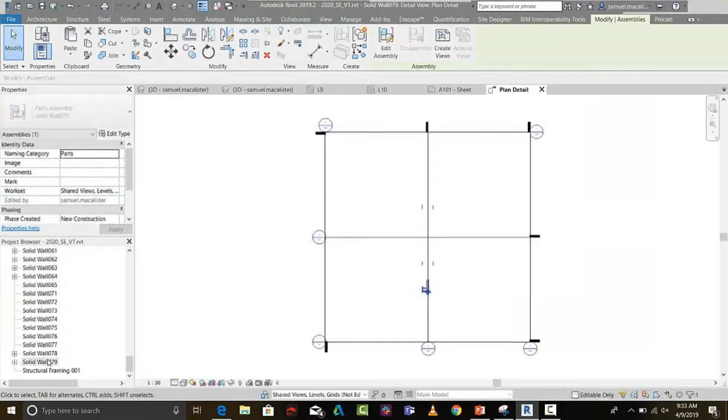So this basically grabs the information as a number of assemblies and generates views, and then I can bring these views into my sheet. So what I've done here is I decided to generate some views, and what I can do is I can drag that information that's applicable to that particular part, because we've broken it down into a precast concrete part, and we can load it into our sheets.

So all I'm doing here is just grabbing the information that's needed. I don't need to schedule anything. I don't need to go and create views or sections or whatever in the model. It just does it automatically. And within a few minutes, I can drag all this information onto my sheet. And here I have a typical precast concrete panel ready for a fabricator to work off.

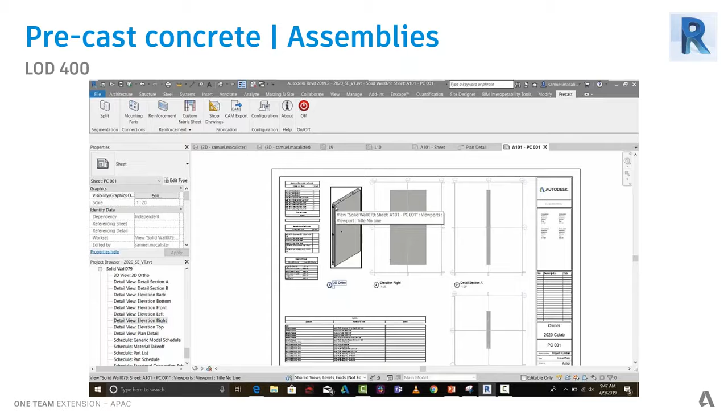Now, hopefully you can export it out and share the building information modeling data with them. But if they're not ready to use that, you can still give them this shop drawing.

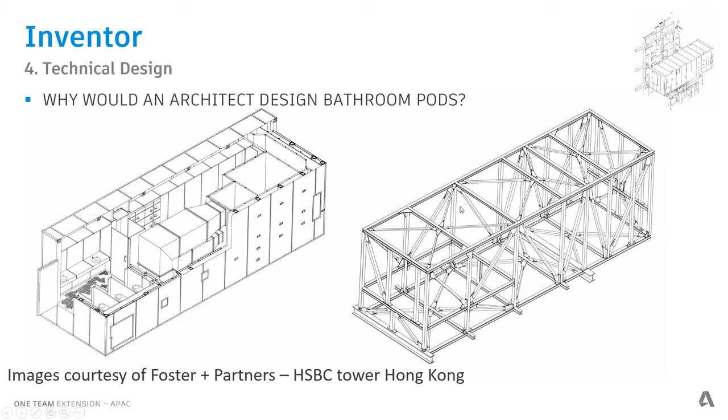These are some images provided to me by Foster & Partners on the HSBC Hong Kong Tower. They did these bathroom pods that were fabricated in Japan, then shipped to site and installed in the building. They did this because they had to meet a very tight schedule. It's a great way to speed up the design of the building and then assemble it on site.

Back in their day, when they did this building, they made models to work out all these pipes. When you're doing pods and you've got a heavily serviced building, all of this needs to be worked out. They didn't have the tools we have now back when they did this building, so they were heavily using physical models.

Now, you don't need to make cardboard models. You can do it all in Inventor and bring it into Revit. Inventor isn't inside the collections, but it's something to consider if you're working with a manufacturer. You can bring in this LOD 400 data and then connect it into your Revit systems.

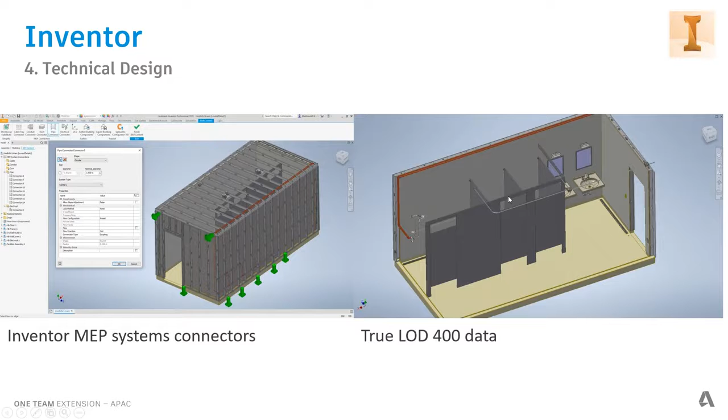So what I've got here is a bathroom pod that was worked up by Matthew McKnight, and you can see everything is worked out here. Every bit of secondary steel in the wall, your steel studs, right down to the hand basins and the screws, and how the partitions are all fixed to the wall, along with some of the services.

So this is a fabricatable model. You could take this into the factory and use it to fabricate from. Now, what Matt can do here inside of Inventor is export it out as an ADSK file, and I can import this Inventor data into Revit.

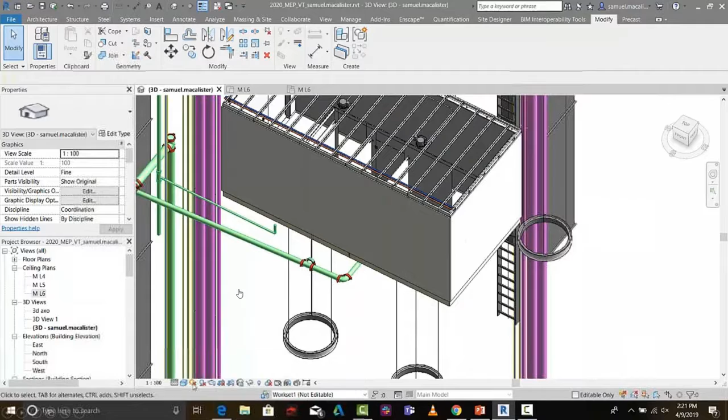So here we have that same bathroom pod, and you can see all the detail. It's all come through clean. I can import it in, and then I can start to use it inside of Revit.

So if I want to connect it up into the services of Revit, I can draw pipes out of that Inventor model and then connect them into my existing services inside of Revit. So here we have our supply pipes, going from the Inventor model into Revit, and that's now connected up the two supply pipes for the hot and cold supply feed inside my Revit model into my Inventor bathroom pod. So it's pretty cool.